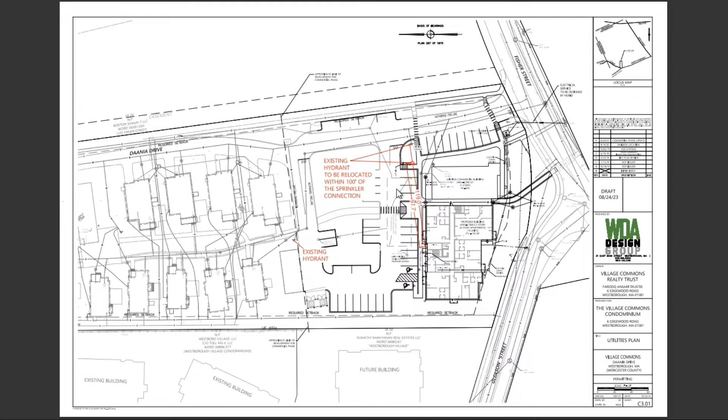Next is the Active Transportation and Safety Committee. They did mention there might be a possibility of extending the bike trail as per the BWALT feasibility study, so we are okay with that. So that would be an easement then, that would be shown on a plan at some point? Yeah, we would like to know more details of what that bike trail would be. I think Jenny and the town engineer can probably help with that.

Next is the school department. Their question was how the children for the new residential building would be picked up, and whether there would be a new stop proposed along Gleason or Fisher Street. What we suggest is that this exhibit shows the existing TOV stop along Fisher Street and the proposed walkways from the proposed building. All along here there are ADA compliant walkways, two walkways and crosswalks to get to the existing TOV stop. So this should be able to suffice.

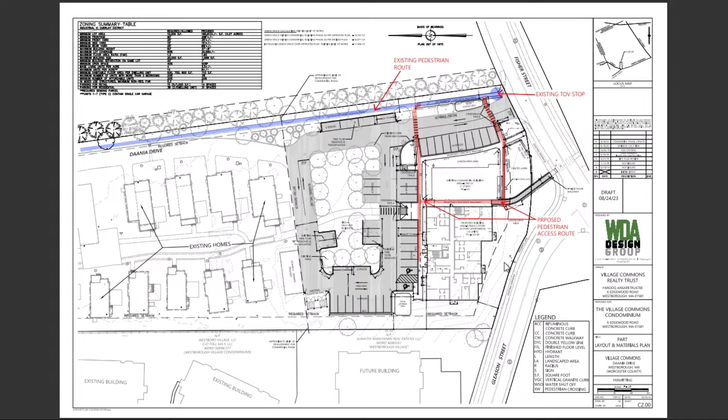I think that's a decent walk to have everyone from this building go to the bus stop at Daania. I think you should try to split that up into 2 bus stops. I don't think the school will ever do that. One will be sufficient, all the way up.

Where are they getting picked up currently? Right at the end of the drive there, at Daania Drive. Oh, that's right, okay, so never mind, I apologize. That should be sufficient, and I think it's going to be helpful if there's a walkway running. There are actually 2 access points for that, one running down between the buildings, so the kids have a choice of walking down there and going on the sidewalk, or going through the development and then down Daania Drive. So I think that's good to have 2 access points there.

I'm confused what the reference to TOV is on that plan. TOV references the zoning in the area, transit-oriented village. The school department's comments are that they didn't want kids walking over to Westborough Village, but they wanted to know where, so I think that would be labeled a school bus stop, not TOV stop.

Does anybody know where the kids for Westborough Village are picked up? On Gleason, halfway up the hill, where you enter into Westborough Village? Is that where the school bus picks up all those kids? I don't know, nobody knows. I assume it's up at that entrance, but I don't know if the school bus actually enters Westborough Village.

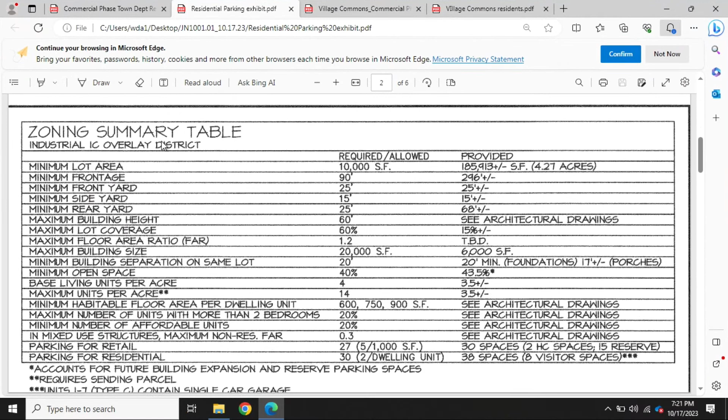Yeah, I'm just looking for that letter now. So if you want to discuss the parking while I find that. Yeah, so going over the approved plans, the concern was visitor parking. The residents are concerned that there is now less visitor parking than was approved prior to this modification. So here, I'm sharing the approved plan as it was approved in 2015, and also zooming in on the zoning summary table.

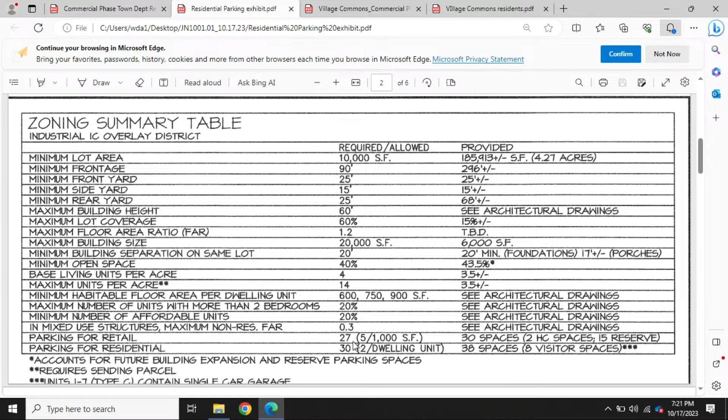If you look at the two bottom items, they show parking for retail and parking for residential. As per the zoning bylaws, 27 parking spaces are required for the commercial phase at that time, and for the residential, 30 parking spaces are required. What was provided per that plan are 38 parking spaces -- 30 for the residents and 8 for visitors, located here on this exhibit. In red are highlighted all the parking spaces that belong to the residents.

So these have been as built. There are 4 covered garages with 4 parking spaces each. And then there are additional residential units with a 1-car garage inside the unit and 1-car parking space in front of the residential unit. So this covers a total of 30 parking spaces for residents.

Moving on, this exhibit shows additional 8 parking spaces at the rear end of the property for visitor parking spaces. So this is exactly how this was built.

And all the parking spaces in the front, there are 45 parking spaces in the front that cater to the commercial space. The requirement is 1 parking space per 200 square feet, and that comes up to 45, and that's what's been planned here. So that was the breakdown of the approved plan.

Now currently, looking at the modification, we still have 45 parking spaces. All that we've done is we've been able to reorient those parking spaces so that the central garden area has more green space.

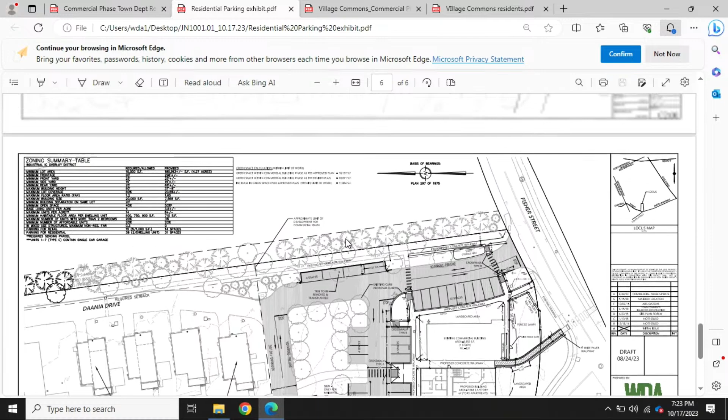So if we compare what we are proposing for the central island green space, we now have 11 parking spaces along the edges, but as per the approved plan, we had 19 parking spaces along the edges. So we made an effort to reduce parking within the island, and that impacted how many total parking spaces we can get into the site.

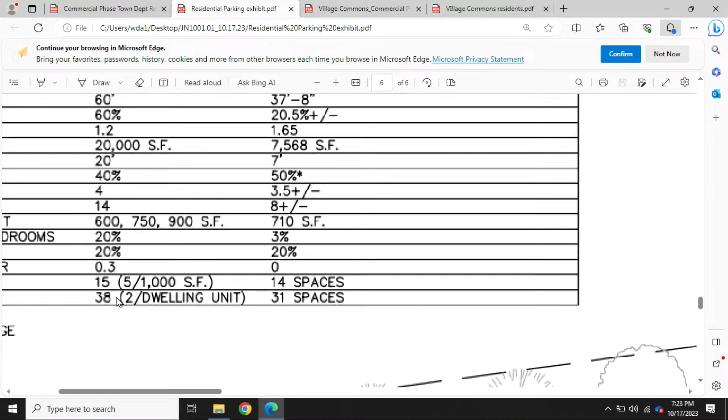So now, according to the proposed zoning table, we require 38 parking spaces, 2 for each dwelling unit, but we have only 31. So we have 7 less for the residential and 1 less for the commercial space.

So we do have less parking, but we do have an overall increase in the green space, and that's been consolidated for central space for the use of all the residents.

And also, there is also this concern that the total allowed sewage capacity for this new building and the commercial building is going to be 4,000 units, I believe. So really, the occupancy of the commercial space gets limited by this metric, and then the requirement of the retail space for parking spaces eventually gets limited again.

If we have low occupancy, then we have low number of people visiting that retail space. So the possibility of overlap between the retail parking and residential parking can be greater. So even though overall we have less parking spaces, we have enough for the residents.

So the existing residents have the same amount of guest parking that they did with the original approval? Absolutely, they do. That answers that question for me.

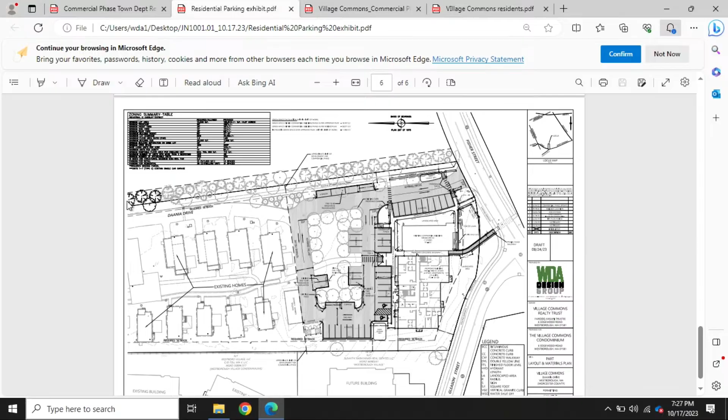So does this kind of planting go all the way back? No, it doesn't. I do think the plan calls for more plantings.

I'm not sure if those are going in this fall or not, but I know when I was there, I got a really good look at the neighbor's bulldozers. Right, for the rear portion of the site, that is the case.

I believe the applicant has another plan that got reviewed with the design review board, adding planting there. I think they're looking at the fact that there was a discussion even here about having the plantings run all the way along that line, and I know Farooq is aware of that. He has some ideas, and we talked about putting an arborvitae to go all the way back there, so they will have a green barrier versus a fence barrier, but there'll be visual screening between them and the neighbor.

But it'll be green, as I said, versus a fence. So that makes sense to me, and I think that's what design review was looking for, is something more along that line.

If I could just make a comment about the fence between the projects, it's interesting to me that when the neighbors originally appeared here, they said they wanted to be good neighbors and work with the new building, and then now all of a sudden they asked for a fence between the two projects. Quite frankly, I feel very strongly that this is not something the planning board should be dealing with. If homeowners in each of these developments wish to put up a fence at a later time, it's totally up to them. But I do feel strongly that we as a planning board should not be entertaining that particular item.

That really does limit their parking. Is there a reason it has to be on that side of the green space? Well, it's to protect and contain all the construction area, so we are removing some pavement from these areas. And then there is a construction entrance, so the trucks are coming in and entering the site here. So you want to allow enough space for the truck to turn and access the site.

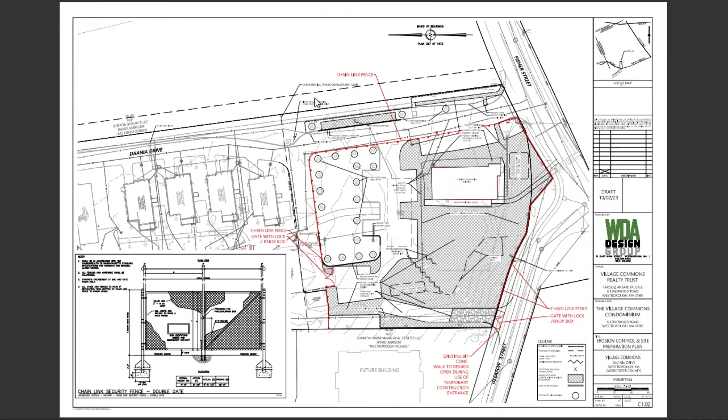I think one thing could be that these 4 spaces could be prioritized and created before the rest of the landscape work is done. And the commercial building is built, is there a reason you're enclosing that as well? Because those spaces in front of the commercial building could be useful while that building's empty at least. And I'm presuming it's probably going to be empty during the entire construction period. Sure, yep, that can happen. So you understand that, okay.

All right, so if we move the construction fencing, those spaces in front of the commercial building, I think there's 10 at least here, 10? 10 here, yeah, those would still be open and available. Yeah, that's fine, the only thing is the construction people, they should not be parked there all the time. So something that can be worked out, then I think should be fine for temporary use. Yeah, no, I agree.

I mean, it severely limits your access to any of that parking. Yeah, and I would suggest the parallel parking, I know it was the approved plan, the parallel parking over there, the kids will walk that way to school actually, right? So we have to be careful, you guys have to see how much space there is, or should you put a fence or something? Otherwise, while parking, if someone goes up in the green area or walkway, that is just a request, guys look into that one.

Will there be a curb there? There will be a curb there, yeah. Granite or bituminous? There will be a concrete curb. Okay. And this is visitors parking, not the others. So obviously visitors parking is not used all the time, so I think as far as the danger goes, we have less risk in the fact that they'll probably be used less time.